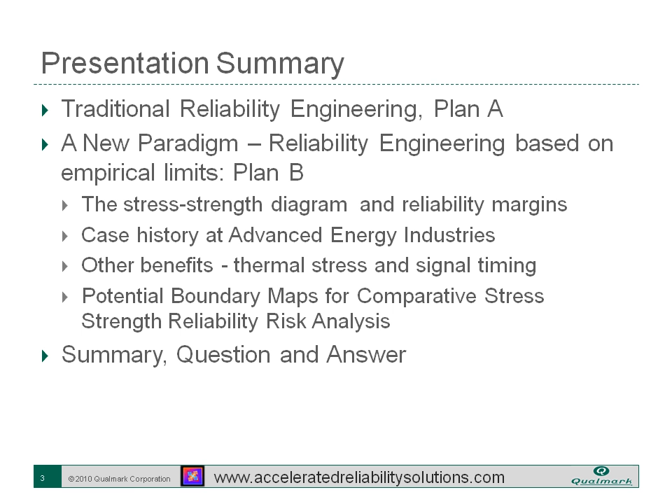We want to base it on stress-strength concepts. We'll do a brief case history at Advanced Energy Industries, and talk about some conceptual advanced applications of HALT, including boundary maps and other things we can do once we've reached and found limits. We'll be happy to answer your questions at the end.

Looking at traditional reliability, or Reliability Plan A, it was somewhat absolute-based, in the fact that we talk about the absolute life in components. Testing was the foundation of traditional reliability, and it was built upon adding up fit rates, calculating all the fit rates of components, and then coming up with an MTBF level.

Components failing continuously throughout the life of the product was one of the assumptions. And of course, the dominant stress was high temperature, even though few common failure mechanisms were dependent on temperature only. Reliability tests were based basically on the worst case conditions that might be in the end-use environment, plus maybe some margin. There was a belief that the life of the components could be calculated, and therefore test equivalence of life acceleration of the components, and therefore of the system, could be calculated.

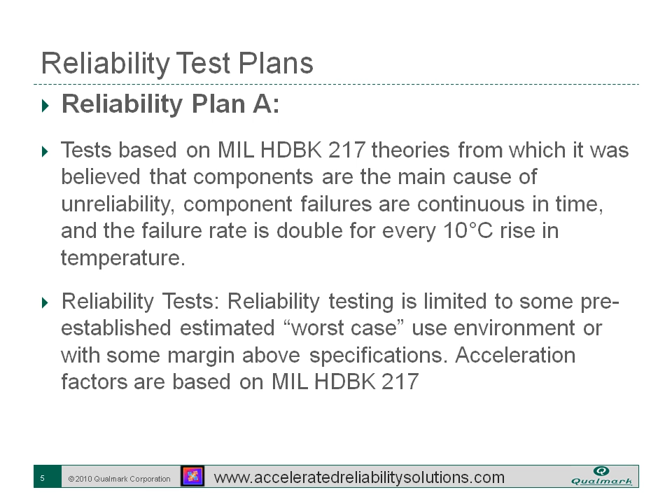Of course, the pros and cons of traditional reliability testing. The pros: for the most part, the system would pass, and during product development, that's a good thing in some cases. But this leaves a lot of questions regarding the reliability risk that the product may have.

It's also not using the full stress capabilities, as most of us in this field of HALT realize, once you start testing to limits, you find most systems have much more margin than the designers ever expected. Low margins would possibly be discovered later in mass production, hopefully not at your customer site.

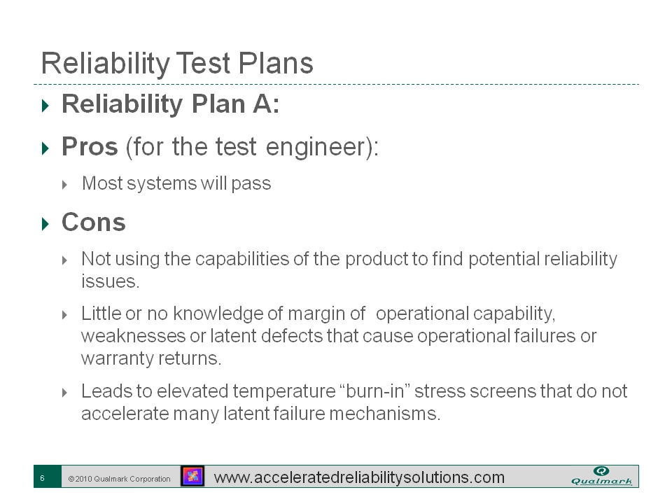It leads to thinking that elevated temperature is the best burn-in, best stress for accelerating failure mechanisms, and that resulted in the traditional burn-in process. And the worst thing is that you're leaving test capital from the additional stress margin capability—testing capability capital is being left on the table.

So looking at the alternative in the new paradigm, reliability testing Plan B is really based on empirical operational boundaries and limits.

The first step, of course, is to build good prototypes using design rules and lessons learned. Use HALT to find the margins. If they're not at the fundamental limit, then improve those margins within the cost constraints. And then that would lead to a robust product that you can develop an effective HASS or HASA process on.

Just a word about terminology before we move further. One of the terms we use, and it's used quite widely in our testing, is failure. And that's a fairly negative connotation. But we really want to talk about limits.

Of course, we know HALT and HASS. HALT does not have failure, it just has limits. And you might consider a failure a success, especially a failure to operate when the product has a very wide margin. That would be a success if the product had a wide margin on first pass.

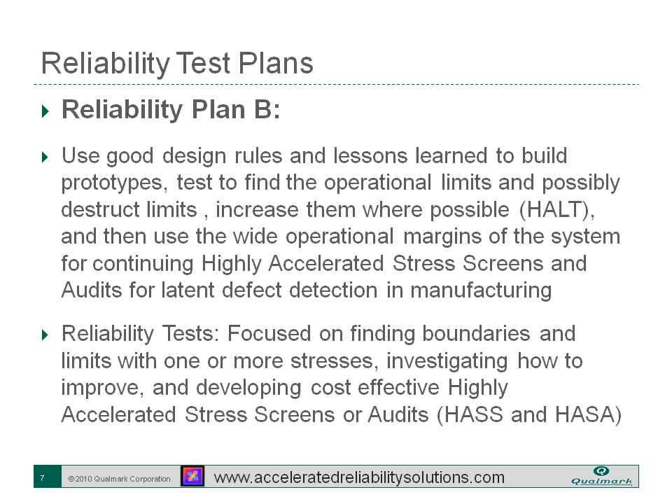So what do you do before you have the prototypes? Well, you plan for your testing and assemble all the test equipment required.

So the benefits of reliability Plan B, of course, are that it's the fastest method for finding the design weaknesses that could impact reliability.

Operational margins can be used with the highest rate of stresses to validate reliability. Many believe that the cons of stresses are potential lack of correlation of weaknesses to end-use environment. Many believe that the weaknesses found at high stress conditions are irrelevant, and this leads to a lack of investigation in what is found in the limit test, and therefore the lack of ability to correlate it and find out if it is relevant or not.

There is a higher risk, of course, of catastrophic damage to the sample under test, but this mostly occurs in the vibration aspect of HALT. My experience in 20 years is it's very, very difficult with thermal limits or thermal stress to destroy, especially digital electronics, or cause catastrophic failure, because the operational limits usually come well before the destruct limits. Especially in cold, it's very rare, as most systems will fail their signal integrity and cause an operational failure before destruct.

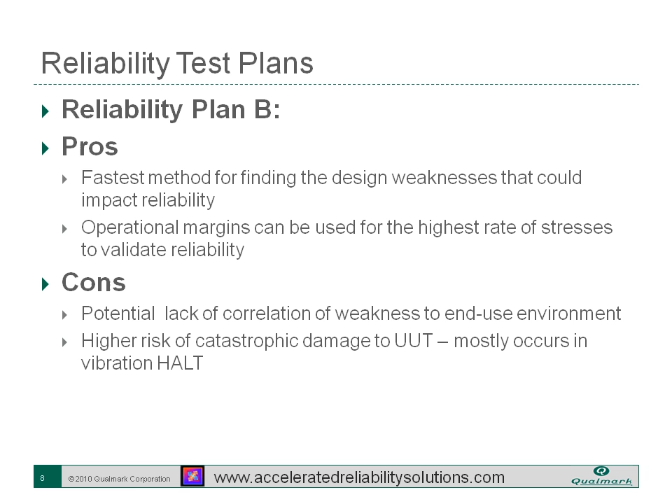Just to go back and understand a little bit of how it became this way, we look at the history of reliability electronics. Back in the tube days, of course, thermal issues were dominant. The hotter the filaments and tubes, the faster the tube would leak and the filament would burn up. This thinking kind of carried through to the early days of solid-state electronics, where there were very few electronic manufacturers and methodologies, and thermal stresses may have been more of a dominant factor.

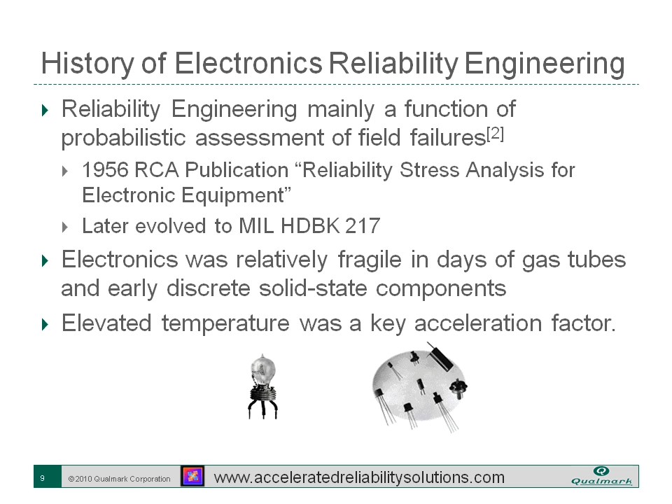MIL Handbook 217 would have had some correlations to real-world failures. Of course, MIL Handbook 217 hasn't been published in 15 years. So MIL Handbook 217, of course, was the Bible of electronic reliability prediction, and therefore the foundation of reliability engineering.

It's been removed as a reference for government contractors, and so many important relevant factors were not considered in MIL Handbook 217. Most of the data was way out of date, and the data was not based on engineering knowledge or material science knowledge. Temperature was the main factor causing failures, and it was misapplied to most failure mechanisms.

That's why some people like to refer to it as the Arrhenius equation, as it was erroneous for most failure mechanisms. It's still perceived, unfortunately, as the generally accepted industry standard methodology, and even though it hasn't been published in 15 years, it's still the basis of many current reliability prediction applications, including Telcordia 332 and a lot of the other progeny that came from 217.

It's important to realize why reliability engineering in Plan A hasn't changed much in the decades past.

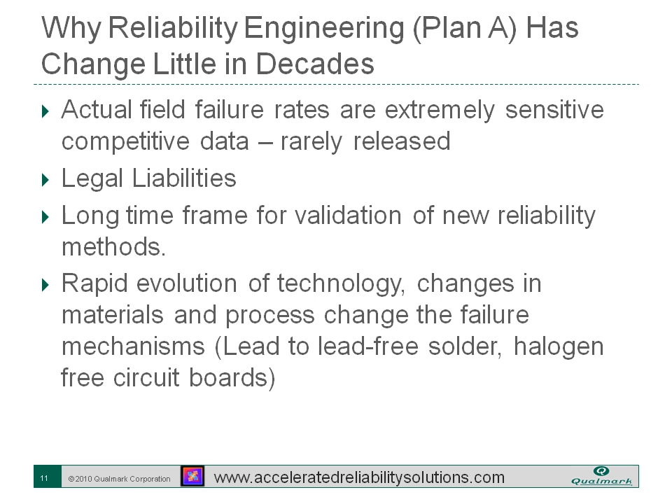So there's a new foundation for reliability, and that's based on the stress-strength relationship. It's comparing the two distributions of stress and strength.

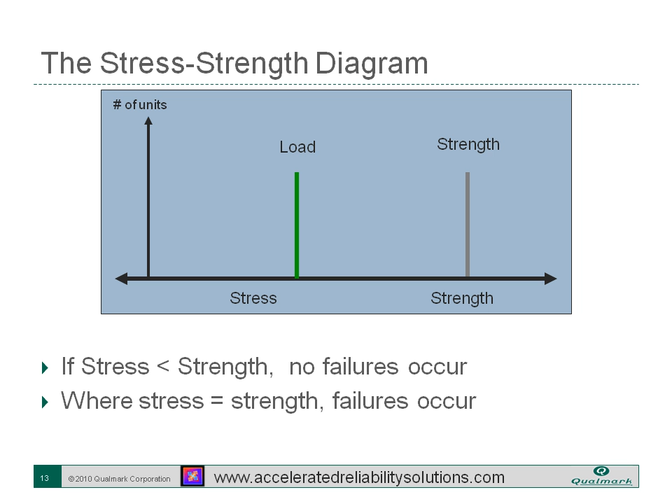Of course, in this diagram, we don't have straight lines, we have a distribution. An example would be a piece of portable electronics, such as a VGA projector or something like that.

In manufacturing, we might have a projector built on a Friday that would be in the low strength area, and that projector might end up being attached to a ceiling in a conference room in a low fatigue environment, staying stationary its whole life. Another projector might be built in a different distribution of strength and end up as part of a road warrior's tools.

He would be traveling a lot, throwing it into the overhead bins, carrying it, dropping it occasionally—this would be a high fatigue area. We can't know from the beginning of manufacture which side, or what life cycle stresses, any individual unit can be subjected to.

The strength distributions hopefully come from your SPC processes, statistical process control, to keep this variation to a minimum. Of course, in your end-use environment, you generally don't have any control, regardless of your specs.

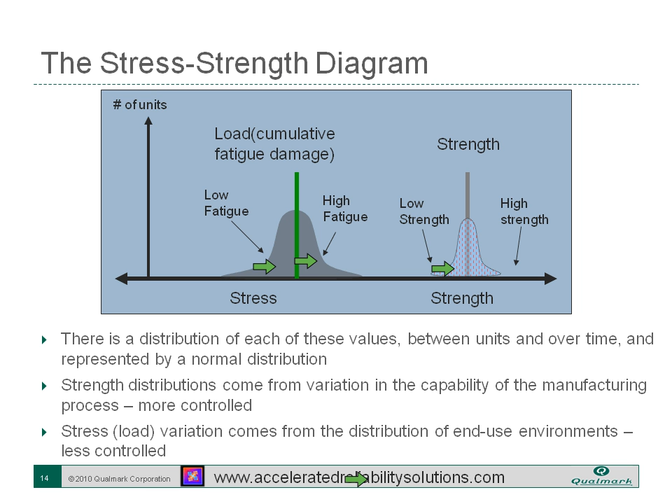So as the fatigue damage starts to accumulate, the load PDF spreads out and starts to shift right. The field failures start to come when the two curves, or PDFs, start to overlap—where the weakest units are subjected to the highest life cycle environment.

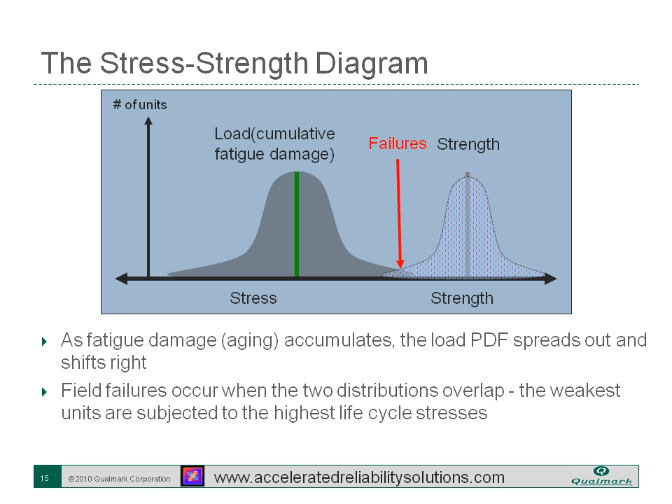One of the most significant changes in the approach to optimizing reliability is using the full range and capability until the inherent technology limit is reached. There's a great quote from the movie Apollo 13 when the actor Ed Harris said, 'I don't care about what anything was designed to do. I care about what it can do.'

And that's really what the HALT process is about—moving it out, finding what it can do, and not being concerned with the end-use environment stress. Because again, you'll find that most products have much more strength than will ever be needed.

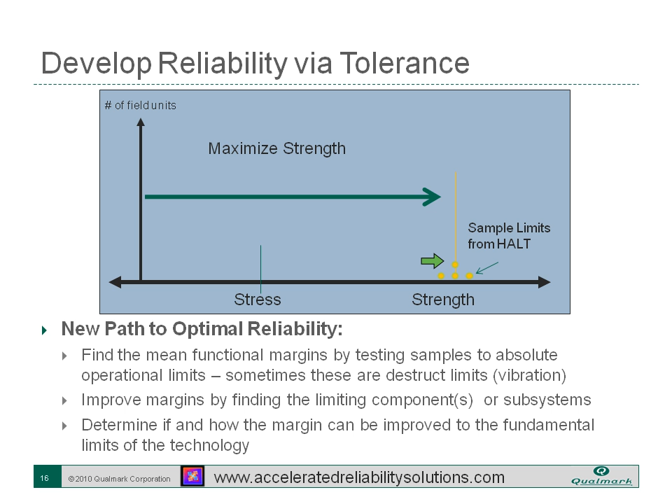Many people think that this destroys each sample, that every one has to be new from the beginning. In my experience, especially units for thermal HALT, can be reused several times, with consideration of what may have been damaged if there's a sensitive component affected by the thermal conditions. For the most part, I've used samples repeatedly without significant change, especially if we're just finding an operating limit.

To build the maximum tolerance for manufacturing variation, including parametric variation, you want to build out to the limits of technology. What you're doing is using the stress range that wouldn't otherwise be used to further improve the product.

Some technologies do have an inherent technological limit. For instance, an LCD—the display function cannot work past about 70 degrees C. That's an inherent limitation we can't do much about. In that case, if you have an LCD screen, you can either isolate it or remove it from the stress environment.

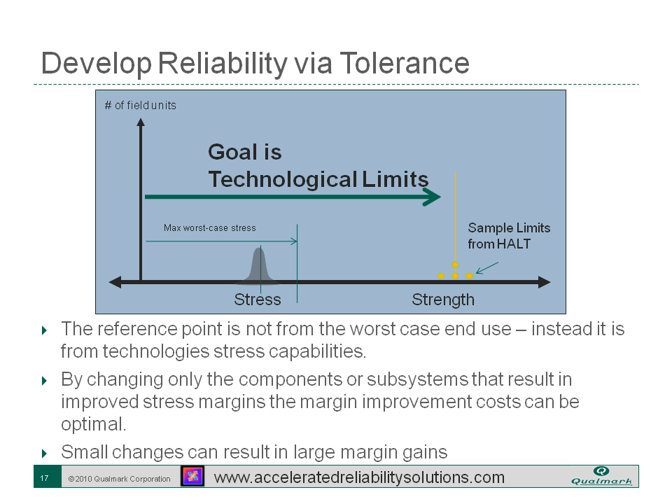Lithium-ion batteries are, of course, another technological limit that can't be changed. But in my 20 years of experience, I've seen quite a few very small changes make large gains. In one particular case, a single diode was changed from an eighth watt to a quarter watt, and that allowed the system to gain 30 degrees C of thermal margin.

So usually it only takes a small change to the weakest link to make a very large gain in margin. It's a simple, iterative test process—simple in principle, but very challenging in practice. Tolerance in the product is key: tolerance for manufacturing variation as well as in-use stress variations, which we have no control over.

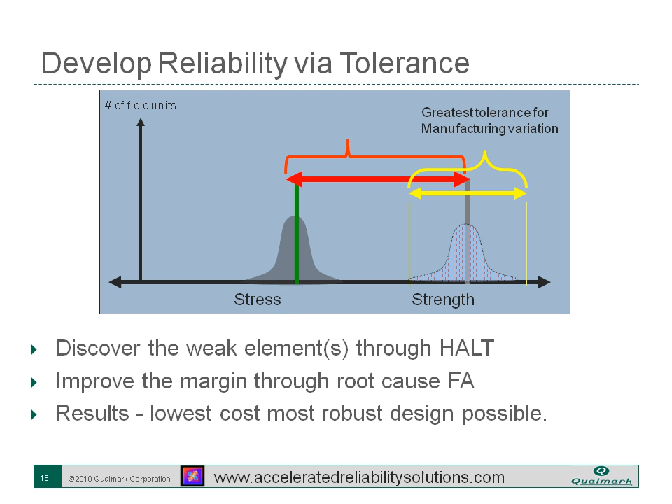Looking at that, we maximize the margin in the PDF, the margin so the PDF distributions in operational strength exceeds the environmental stress by large margins, so that the overlap of these two is very unlikely. So minimize failures by maximizing the strength.

And once you start doing that, you set a whole new benchmark in your mind of what electronics are capable of. There are several other benefits of increasing this margin.

For instance, once you have a large margin of product, you can develop very efficient HASS processes by using that large margin. The larger the margin, the larger the thermal cycles you can make, and the fewer thermal cycles you'll have to make, as well as vibration.

For mechanical strength improvements, you also improve and can reduce the amount of packing materials required in shipping. You can use less protection materials, and maybe possibly, as you see in some advertisements, a portable computer could actually be shipped in a brown paper envelope if it was robust enough.

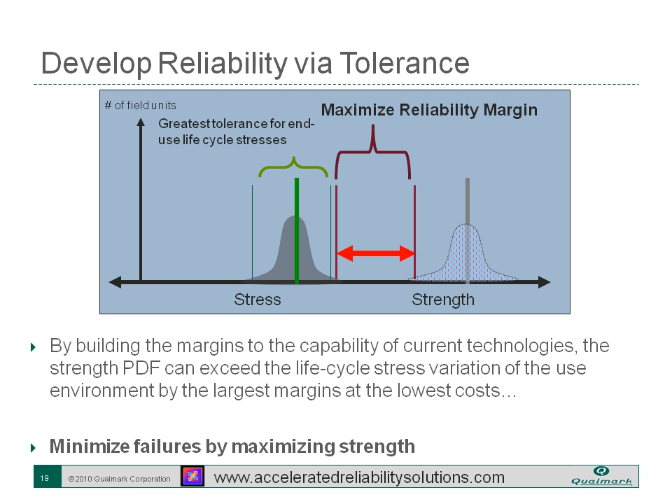I want to illustrate a little bit of a case study here. Back in the mid-90s, Advanced Energy Industries was one of my first consulting clients as I was doing business under Accelero Engineering.

Advanced Energy makes very high energy power supplies that are used for thin film deposition. The downtime for one of their systems in a fabrication facility can be quite high, so it was quite painful for them to have failures in the field.

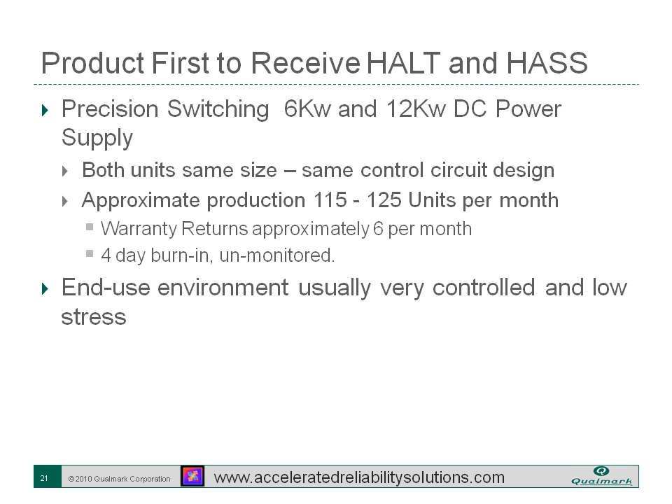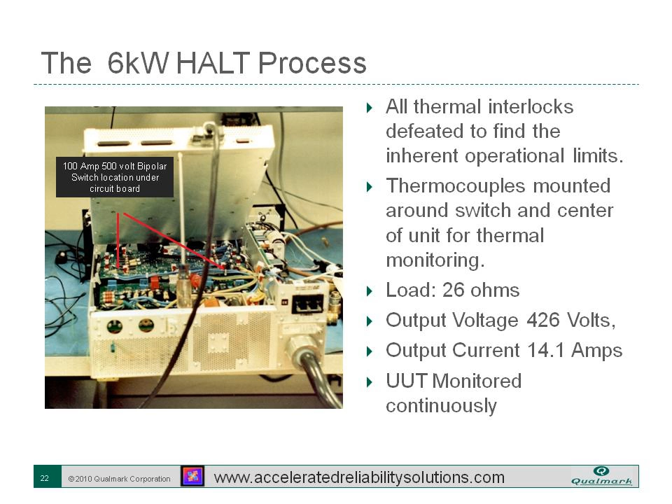And I really appreciated Advanced Energy allowing me to take these photographs and present this in the year 2000.

So removing that 100 amp switch, fortunately a 150 amp switch was the same package configuration. We reran the HALT test, and in our second iteration with the new improved margins, we had a significant change in the average failure point, and one of them exceeded 110C.

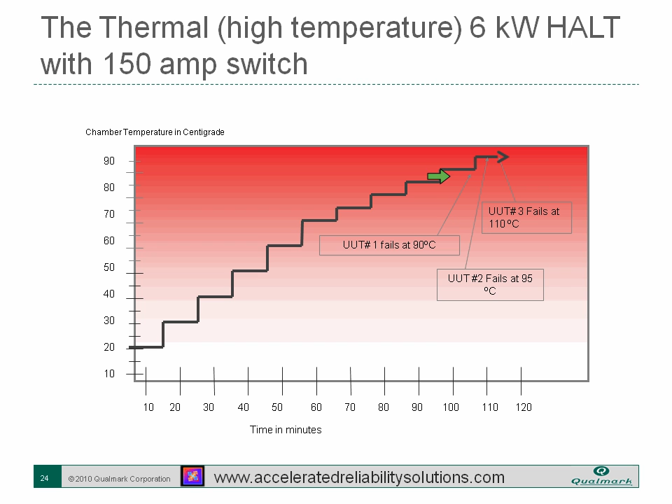It's also the fact that all these started to be grouped together, showing that we had pushed that distribution much closer together. So now you see the results - we basically shifted by switching that one component, which was probably about a $30 cost difference from the 100 amp to the 150 amp, and we increased the mean.

Even though this is a very small sample size, 23C - we basically also thinned up, made narrower, the PDF distribution, which of course was another benefit.

I believe the worst case condition for the power supply, I think it had a 35-degree spec, but I'm sure it ran up to that 50. The unit already had a very good low operating temperature, I think of -10 to -30, I'm not sure what it was, I don't recall. But vibration HALT showed that there was really no need for any changes.

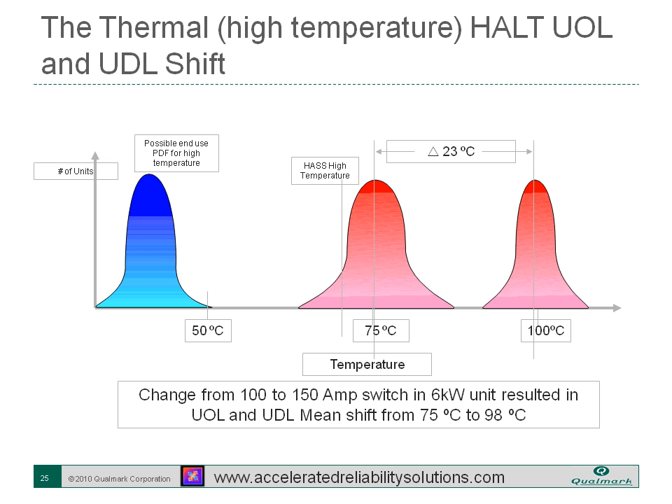So the results speak for themselves. We developed a HASS process immediately after making the changes to the design, and we changed a very expensive 4 days of burn-in to only a 40-minute HASS. I think it was 4 cycles, thermal cycles, and vibration, and it changed the warranty return from 5% to 0.5%.

Needless to say, that is when Advanced Energy asked me not to discuss this outside. So I didn't for the next 5 years.

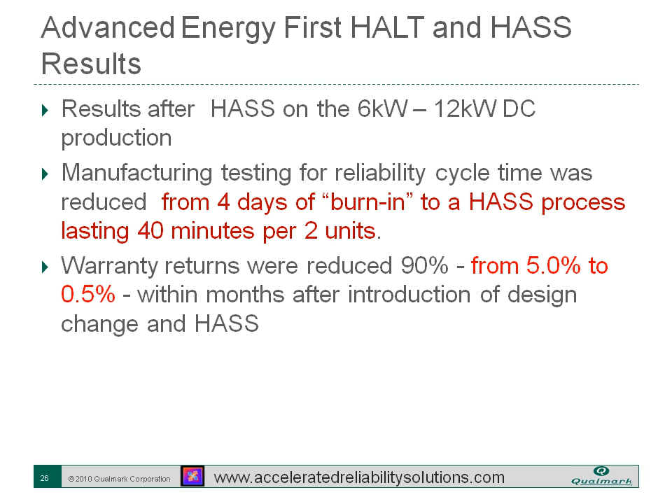We weren't able to isolate the percentage of benefit coming from the change in design versus the change in HASS, because we were basically on a path from HALT to HASS, and didn't stop and wait to see what effect the change in design was going to provide in benefit.

And just a conceptual idea that I've learned over these years - one of the benefits of thermal HALT is definitely in the fact that you can do some shifting of the signal integrity, especially in digital systems. Marginal signal integrity may result in intermittent or unstable function, and it's really difficult to find, especially when it's intermittent.

And this can come from lot to lot assembly variations. Once you start to have a change in the board impedance or other parametrics, you may have a marginal condition get much worse.

And these are very, very difficult to find in failure analysis. A lot of times they're dependent on the system they were in, the marginal system - say a component or a circuit board - and of course it's taken out individually as a circuit board and shipped back. It may not be with the system it was running in, and it's going to be put in a golden system, and it's very likely to be CND in FA without some additional stress or some additional skewing of parameters.

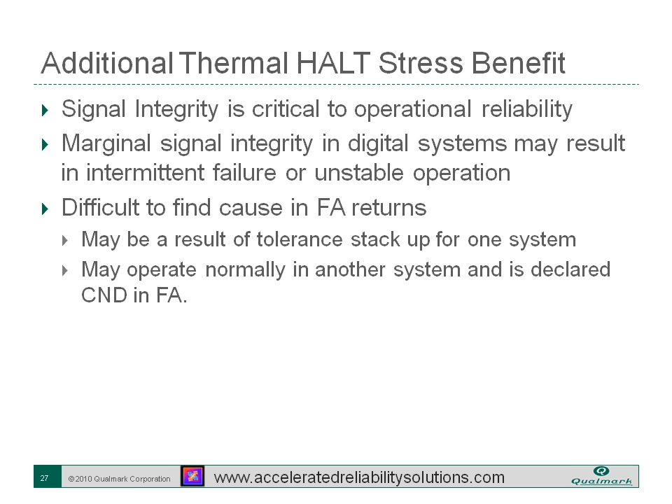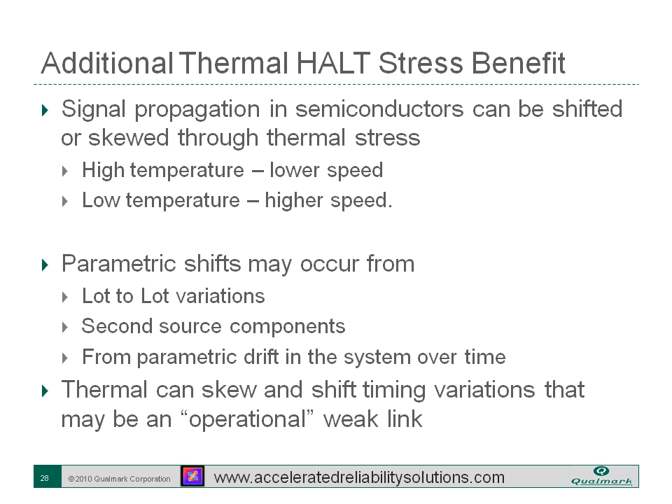So we know that signal propagation in semiconductors can be shifted or skewed through thermal stress. High temperature, we have a lower speed. Low temperature, generally have a higher speed. So we're able to change and shift, skew a little bit the signal propagation in semiconductors, and we may help simulate the timing of parametric shifts throughout the production life and through the product's life, which there may be some parametric drift in a certain component, and that may end up causing intermittent or absolute failure in time.

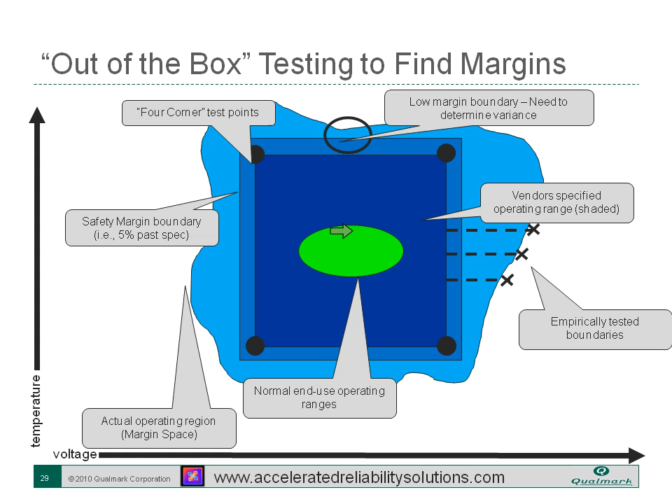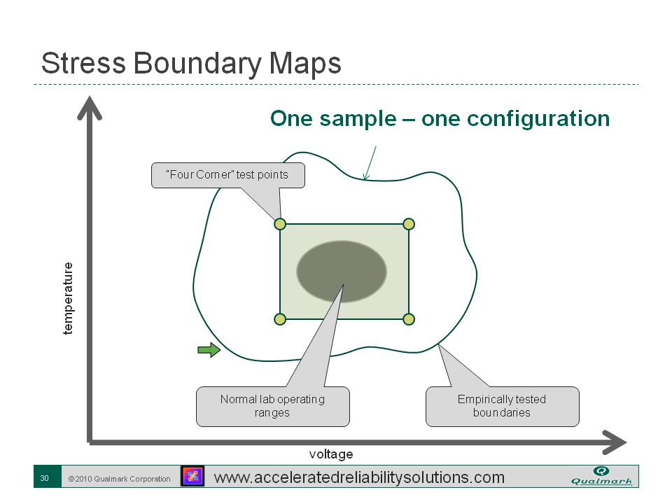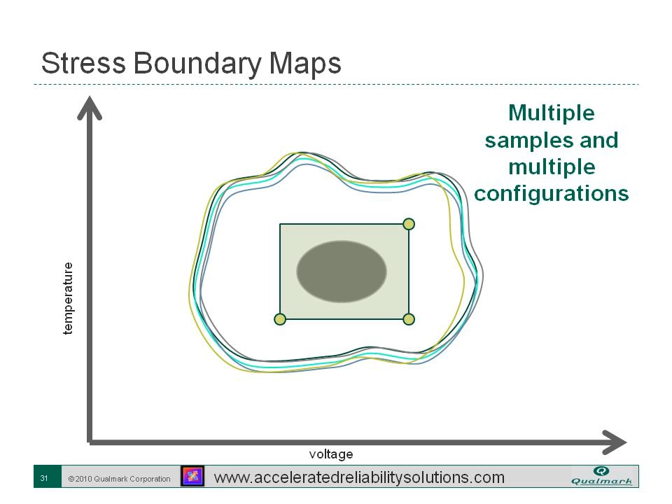As we start to use multiple samples and overlay those empirical boundary maps that we've developed, we start to see variation in those boundaries, some being wide and some staying thin. And this is going to show you the same type of distribution as the PDF, as we see in this next diagram.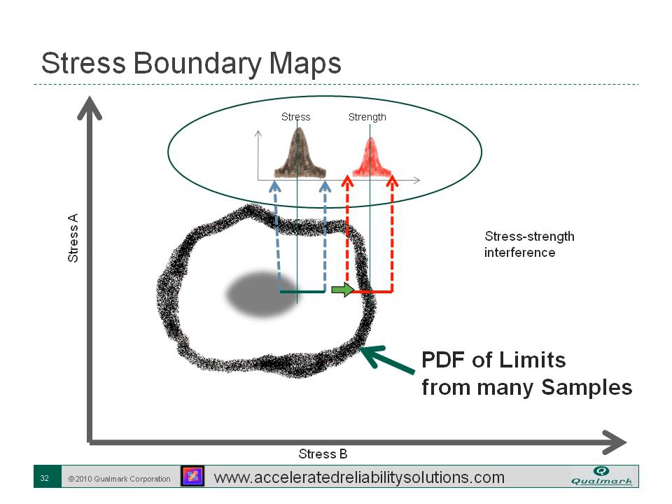So to ensure that reliability margins, once you develop it, it's very important, and it has been my experience that much of unreliability comes from the variation in production, excursions, overlooked incorrect processes, or a process that went out of control and nobody realized it. So what you want to do in the HASS process, of course, is to sustain these margins throughout the time.

And this cloud, of course, the probability cloud, is very dynamic. That margin will change as second source components are brought in, and maybe one component is discontinued and a replacement component is put in. It's very important that those components still produce the same operational margin.

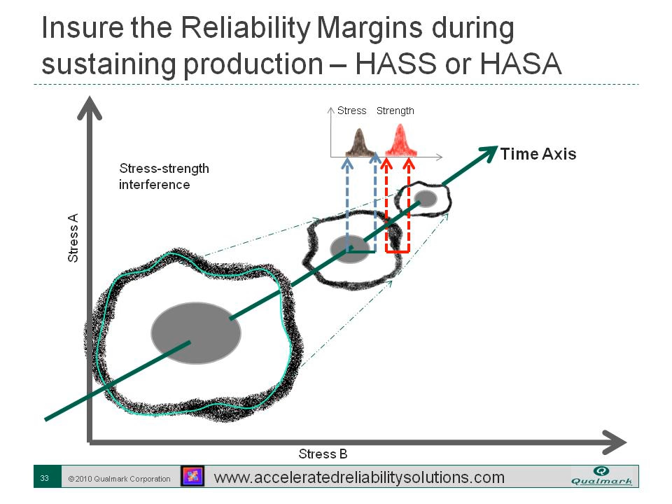Just want to mention or show one of the very few pieces of real data that was produced and publicly released. This is a chart from Dr. Ed Kyser at Cisco Systems, produced and presented at the Workshop on Accelerated Stress Test in Montreal, I think in 2002. He shows a comparison of the operating margin in some Cisco line cards with the normalized RMA, or warranty return rate. It's not a direct relationship, but he put a best fitting curve, as you see here, the equation, showing the relationship of margin versus return rate.

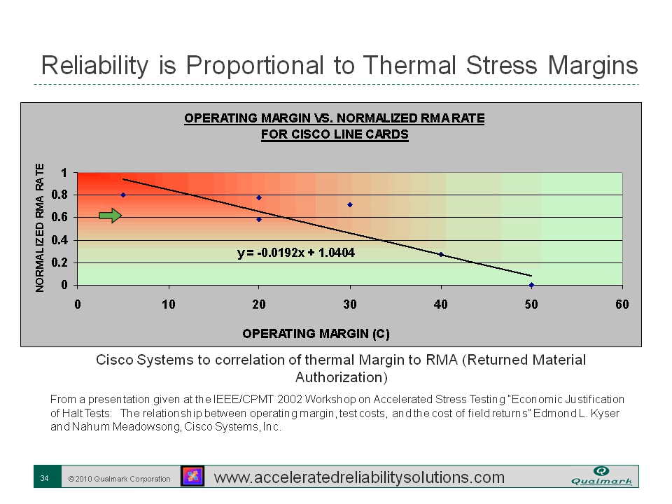When you have this, you can actually start to make a business case for margin increases. Say you might have a cost, say going from a 10-cent cost to a 20-cent cost, by changing a temperature range from 30 to 40 degrees, or increasing the wattage level of a component. You can then determine what your estimated reduction in warranty rates will be, and that's a known monetary quantity that you can compare with your cost of production or the cost of the design change.

There'll be several stresses you could start to key off of. Certainly voltage and thermal are one. Frequency, especially in digital systems, could be another, increasing frequency.

You have to be careful, of course, that the rate of return is only for the mechanical aspect. For instance, if you were comparing the drop height of a cell phone to our mechanical stress level, you'd want to compare that with field returns that have been returned for mechanical failure, not, for instance, those that have been submerged in water. I believe this relationship would hold for vibration, say multi-axis vibration, versus field mechanical reliability and returns of units. Certainly with more robust mechanicals, it would result in lower return rates.

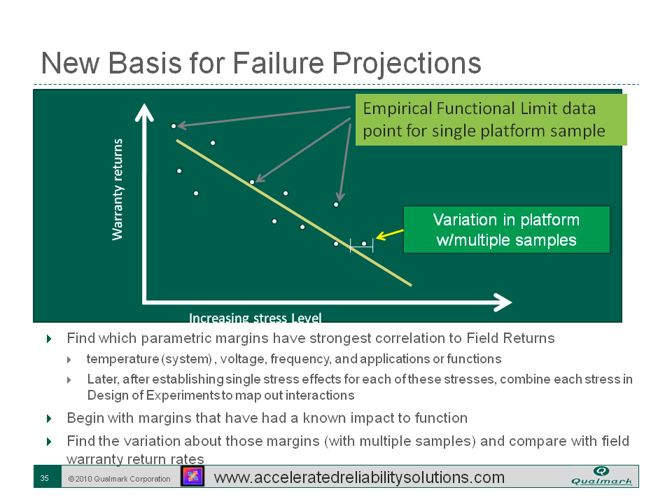And that's the end of the bulk of my talk.